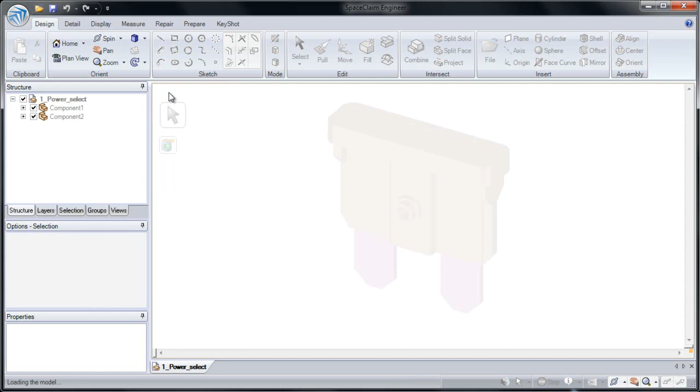Power selection is a really useful technique for selecting many faces or edges at the same time. You'll notice here we have two components, our orange one and our purple one.

Power Select is located under the Selection tab. We have Structure, Layers, Selection. Inside the Selection tab, we enable you to filter for different types of faces, coaxial faces, edges, features, and find things on the model. We also give you the option to search on one body or all bodies.

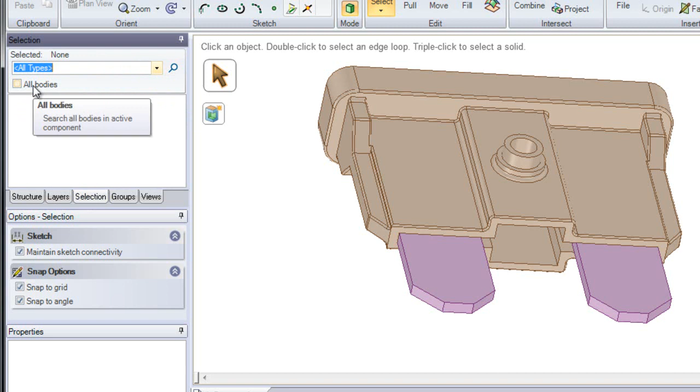It works by selecting on a face or an edge. As soon as you make a selection, it automatically searches for that type of geometry. Let's say we click on our edge down here. It's found edges the same length, edges the same length and orientation, and edges on our top face or our small face.

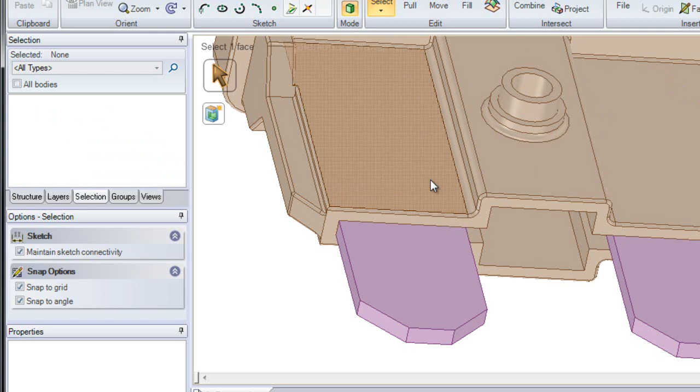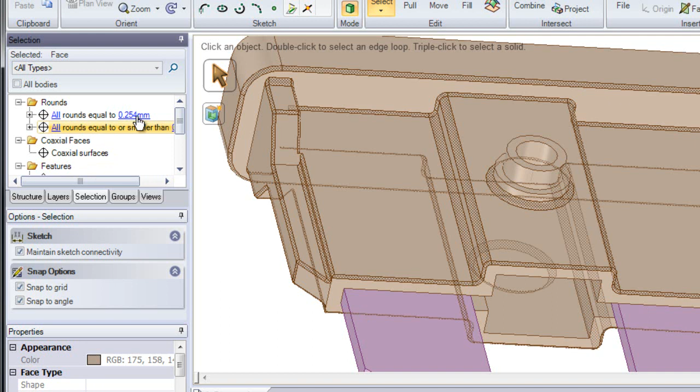One very useful selection feature it goes through is rounds. If you select a round, it'll automatically find all rounds equal to that size and all rounds equal and smaller. Notice you can search for concave or convex rounds, or specify the size of the rounds you want to search for.

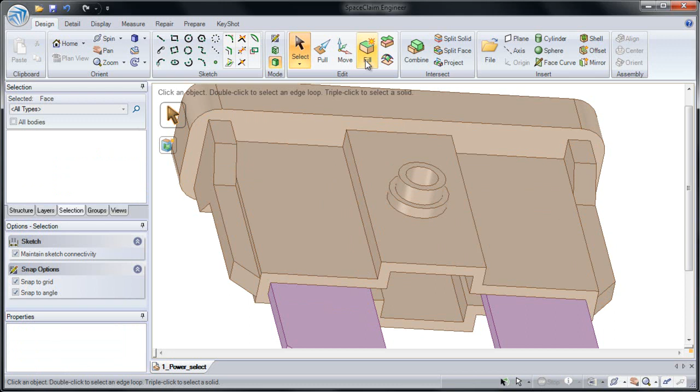I'm going to select rounds that are equal and smaller to quickly grow my selection to 120 faces. Now I can make an edit to them. I'll click Fill to remove them from my model. Using Power Select to grab all 120 faces at the same time is much faster than clicking them one at a time. It's also useful for making edits to the model.

If I click on this face, I may want to grab a depression, a protrusion, or faces with the same area. It searches for planar faces of the same area, and now I can edit them at the same time. We'll pull them in by 0.25 millimeters.

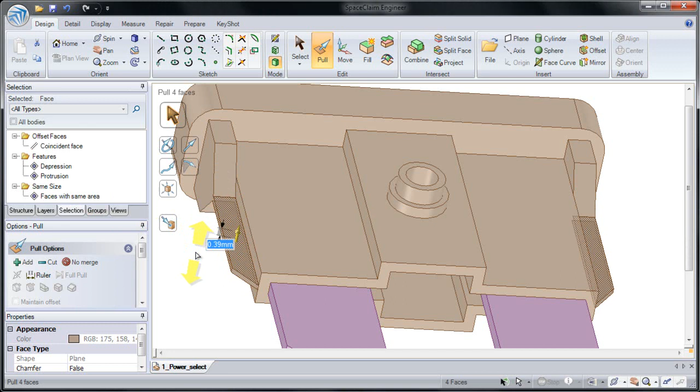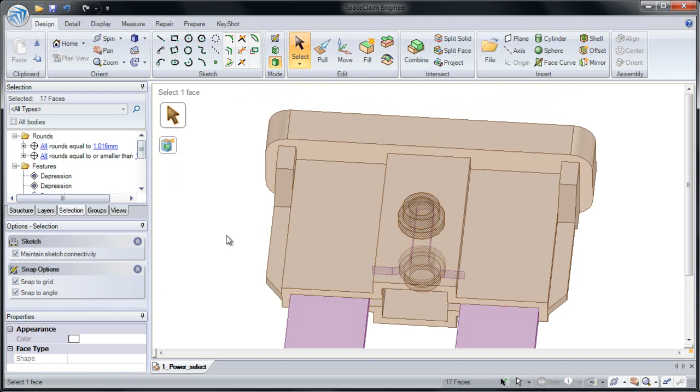It can also be useful for selecting on cylindrical faces. Normally, I may have selected this by doing a big box select. You'll notice that I have some of our faces on the purple model selected. This may not be what I wanted. Instead, I'll simply select one of our cylindrical faces and expand my selection to coaxial cylinders or coaxial surfaces.

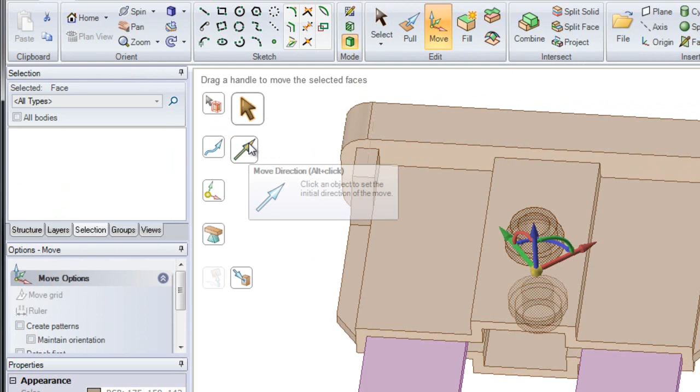Now I can move them all at the same time. Remember, if the Move tool isn't in the direction you wanted, click the Move Direction button and move it along an edge or normal to a face. Now I can drag them together. I'll type in 2 millimeters, or hold down the Control key and make a copy of them.

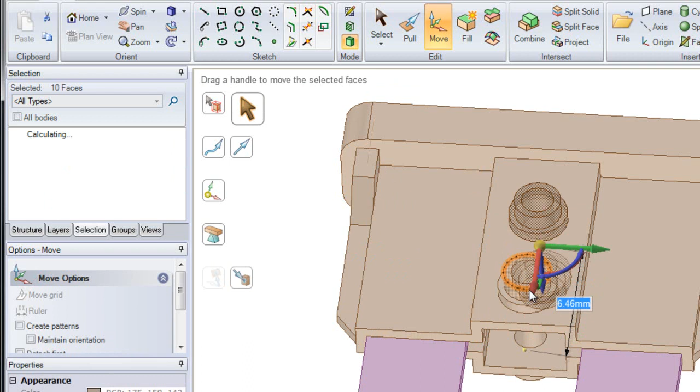Even though I'm using the Move tool to make the change, it was much easier to do by using Power Select. Let's look at one more selection technique with Power Select that's even a little bit more advanced.

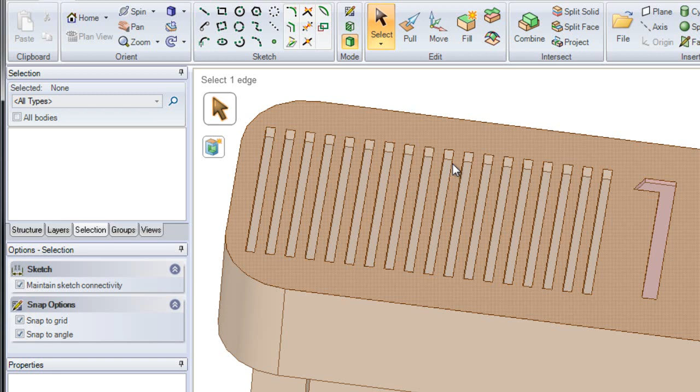If I zoom into the top, I can see a lot of depressions in this top face. If I click Select and select one of the bottom faces, I can grab that depression. Notice we have 5 faces selected. If I click Fill, they'll be removed.

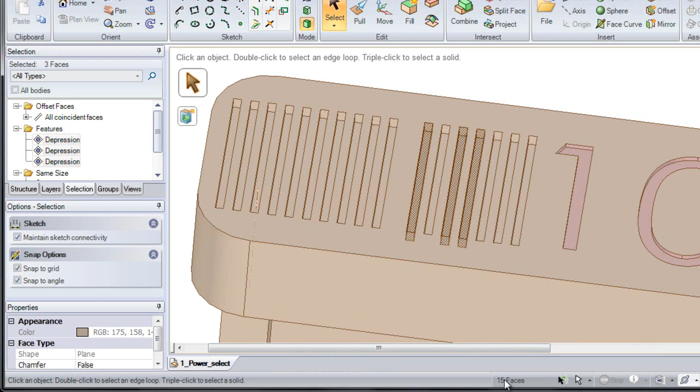If you Control Select several faces at the same time, it searches for all of them. So it just searched for 3 of these faces and found 3 depressions. You can Control or Shift Select them to grab them at the same time. Now I have 15 faces selected, and I'll click Fill to remove them.

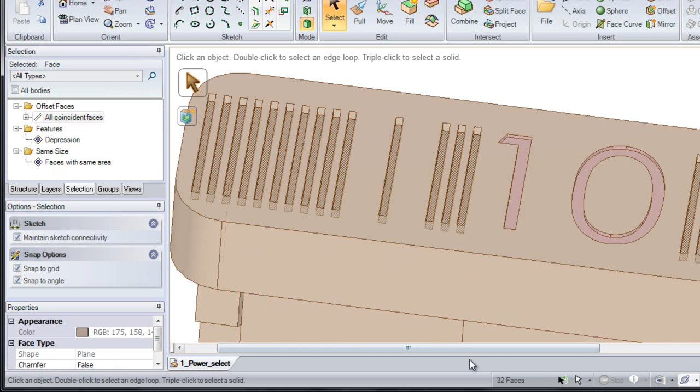Now let's say I wanted to remove all of those depressions at the same time. I'll select the bottom face of this depression and click the Find button. Notice this will locate all of the coincident faces that are there. Now I have 32 faces selected.

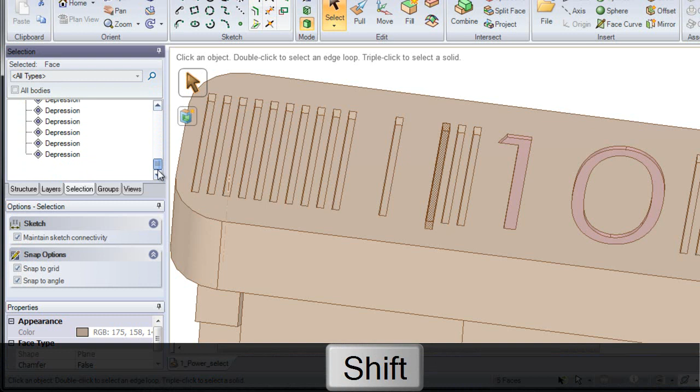If I click the Find button again, it will search on all 32 faces, meaning it should find 32 depressions that are there. If I want to select them all, I'll click the top depression, hold down the Shift key, and select the bottom depression. That automatically selects all of the depressions, which is 160 faces. Now if I clicked Fill, I'd remove them all at the same time.

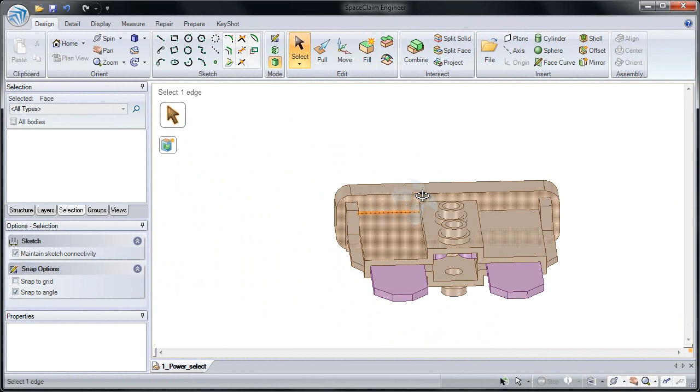Now there's one last selection technique that I want to show you, which I think makes it a lot easier to select on faces. Everyone's seen box select, done by holding down the left mouse button and making a box around the geometry you want to select. You'll notice that sometimes this gives you too many additional faces.

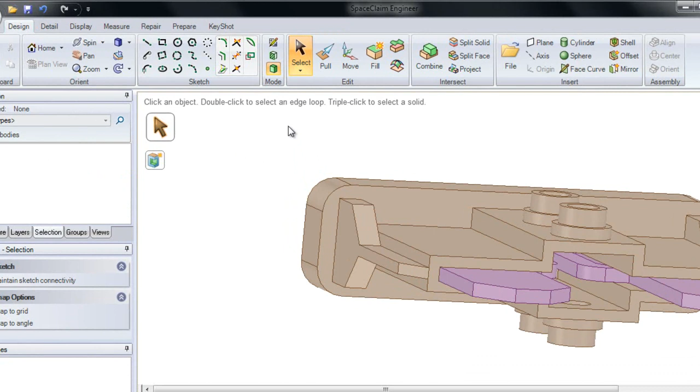Instead, we can use Lasso Select. It's just like the selection technique inside many paint and photo editing programs. Under the drop-down in Select, I can choose Lasso Select. This lets me draw a free-form spline by holding down the left mouse button.

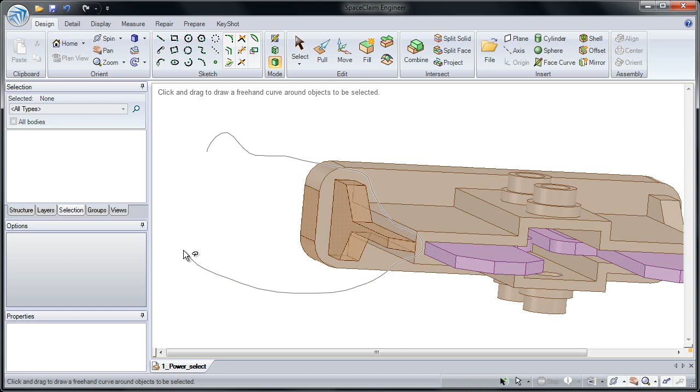Notice now I can control exactly how I want the shape of the box to be, clipping out faces I don't want, pausing to see what's selected, and even coming back to remove other faces from my selection. When I let go, those faces get selected, and I can fill them in.

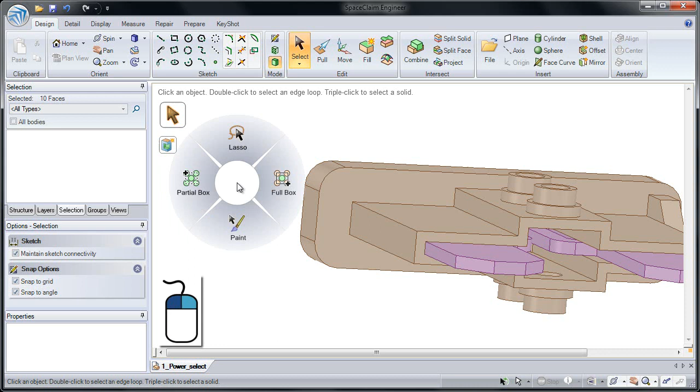One shortcut to bring up Lasso Select is to hold down the left mouse button and then click the right mouse button. This brings up a quick radial menu of selection techniques, and if you click in the center of the radial menu, it'll switch to our 4 basic commands: pull, move, fill, and combine. Remember, that's holding down the left mouse button and clicking the right mouse button. Now we can click Lasso Select and draw our own little box.

So please try to use Power Select to remove all of the rounds from the part, make an edit on the cylindrical faces, remove the depressions on the top, and play with Lasso Select.